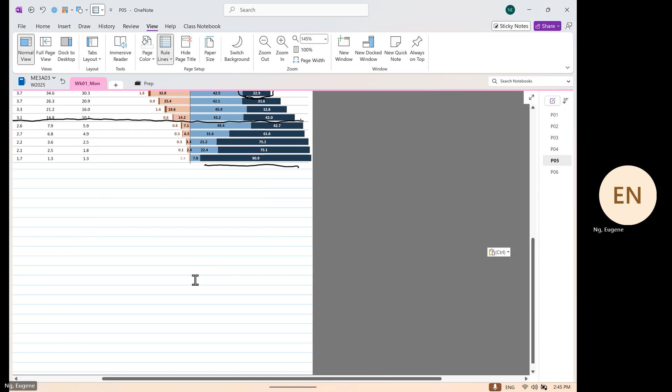It's normal, those of you who are in your third year, and those of you who are in your second year, it's normal that these courses are more difficult than any other courses, okay? The thing to watch out about your degree is the third year is always the year that you struggle most, and it's normal. Because why?

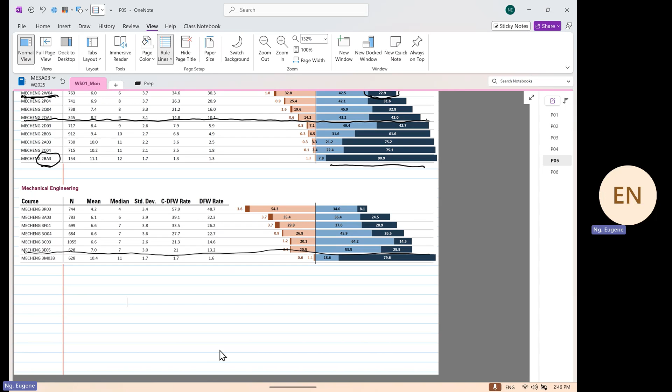When do you feel most pain when you run your marathon? Is it the first 10 kilometers? Is it the last 10 kilometers? It's the middle, and it's normal. Are we clear? Okay. So the toughest time, all these over here are your level 3 courses. Starting from 3R03. It's a bloodbath.

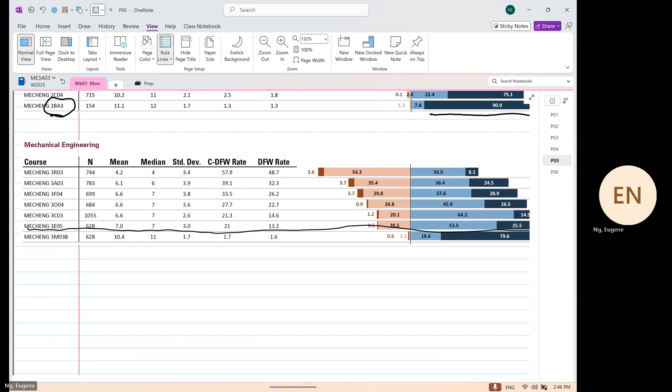You see that? And this was taught by the previous instructor that retired, Dr. Ross Judd. The new instructor, I love her to hell. She's like the female version of Ross Judd. Okay, it's good and she'll really train you well. What's the blackest? This course. Okay, what's the blackest is this course.

Are we clear? Okay. And then if you look at your, so this is year 3. So level 3 usually is normal to have what? Problems. 3E05, which I showed you the exam earlier, now is known as what? 3E03. When it was 3E05, the students were lucky. You want to know why? They had projects. Now you have what? Nothing. No projects. Are we clear?

So if you are going to protest, okay, go to the mechanical engineering department and protest that you need it to be what? 3E05. Are we clear? Okay. So now, yeah, 3E03 is tougher now than before. Are we clear? Okay.

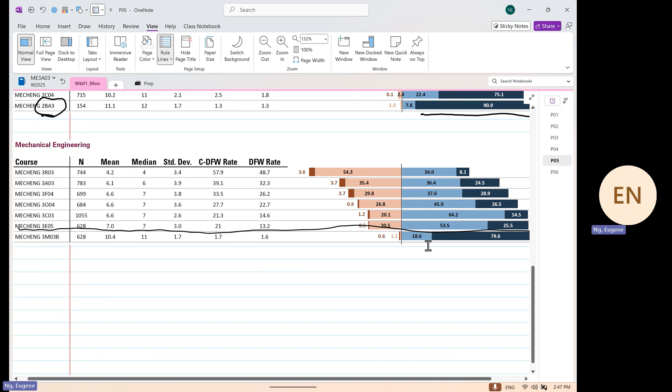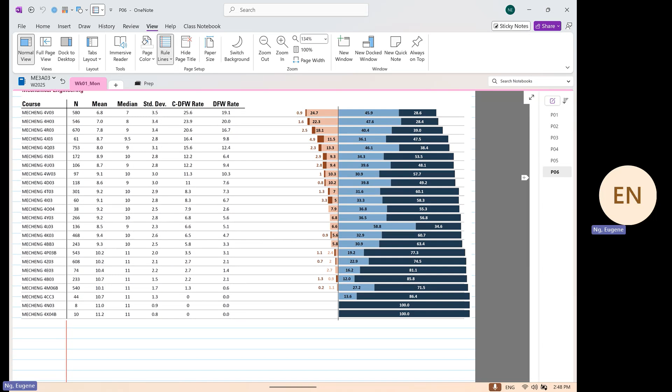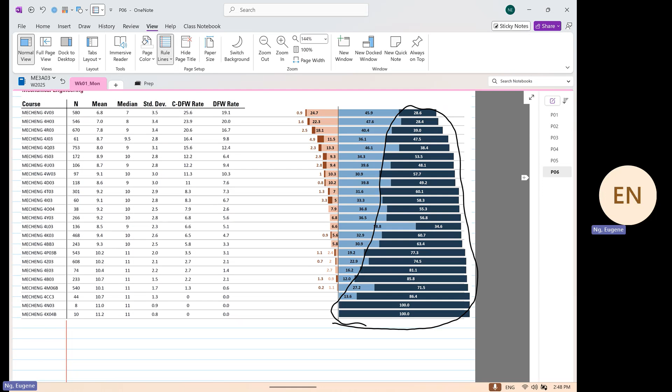Now, the good news is this. These are all holiday courses. These are all your level 4. Can you all see the level 4, how dark is dark? Are we clear? Okay. And I'm going to give this to you. You plan your courses accordingly, based on the information that I have given to you, and use it as a strategy. Are we clear? I can't tell you now, is it more black or less black? I can't tell you. We don't have the data yet. Are we clear? Okay.

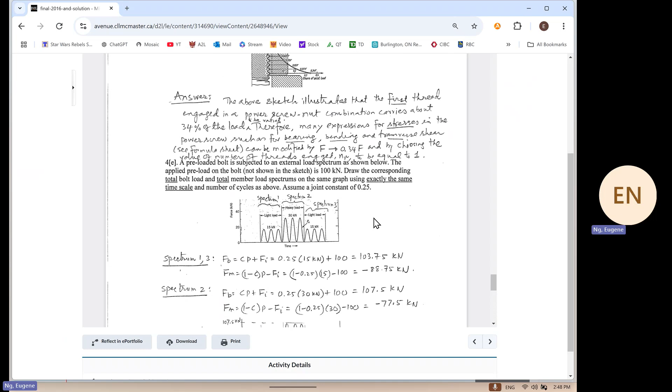So before I go on, oops, yeah, this guy is brutal, okay? It's killer, okay? Right. Any other question before I go on? Yes. Don't know yet. You have just come to the class.

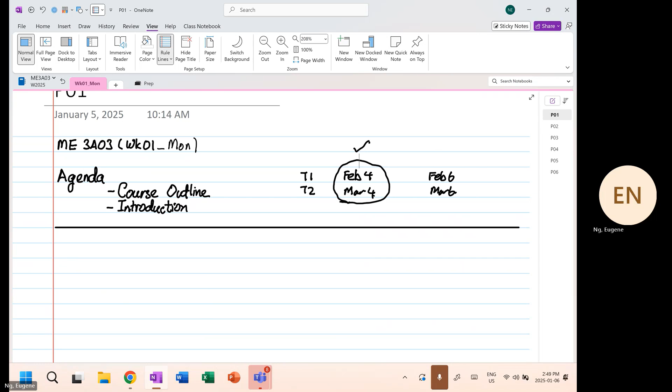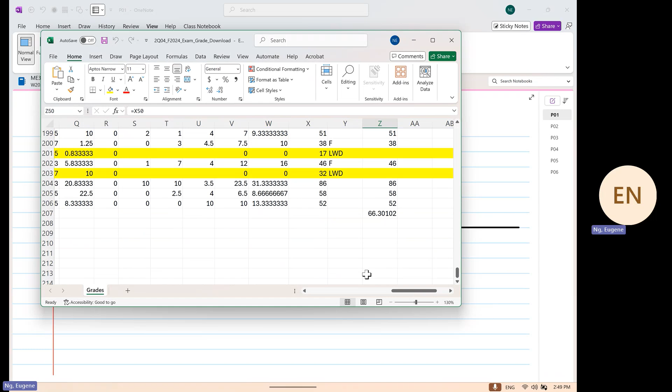2Q. I don't know what's the average for the final, but the average grade cumulative for the final grade. Holy shit. Wait. I don't know yet. Wait, okay. But there was a gentleman that got 100. And I'm looking at the grade now. Can you see anything? You can't, right? The average was a 66%. Okay, and that's normal. Say it again. Yeah, 66 is a C.

Okay. Any other questions? Yes. Say again. Yeah, I'll provide for you. It's to help you. It's not to harm you, right? Okay. Yep. Okay. Let's talk about this course now.

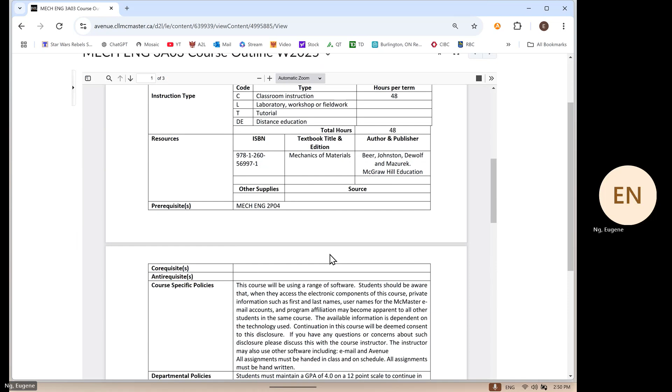So again, your assessment is by homework, okay? And then you got two term tests, and you have your final exam, and you must pass your final exam to pass this course. Are we clear? Okay. Any other questions before I show you what is expected?

Yes. The bell curve? Yeah, no. Let me think twice, okay? If let's say half the class fail and then the faculty of engineering is up my butt, yeah. Okay, but let's not go there. Okay, let's think positive and work hard. Are we clear? Okay. Any other questions?

Okay. Some of you might play the strategy, screw up term test 1 and 2, and do very well for your final exam. Yes or no? It is a strategy. Right? So don't attend this class. Final exam, we focus. And I'm going to show you why that is a recipe for failure. Okay? I thought about it though.

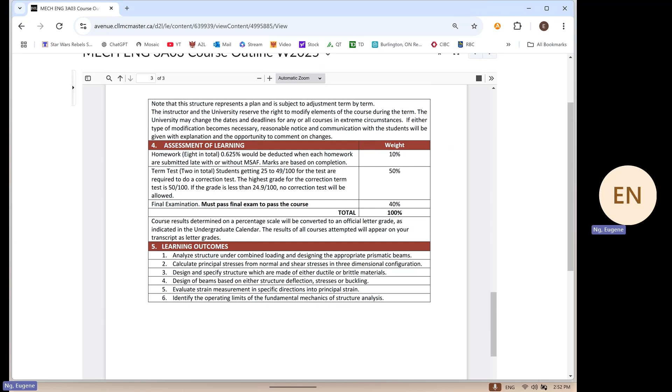If I've done this, maybe final exam is 40 plus 10. If I really do well, term test 1 and 2, I can mess it up and I can still pass. No, you will not pass. And now I'm going to demonstrate to you why you won't make it. If you look at the context of this course, what am I trying to teach you in this course? Okay, so it's like an introduction. Right. Let's go for the introduction.

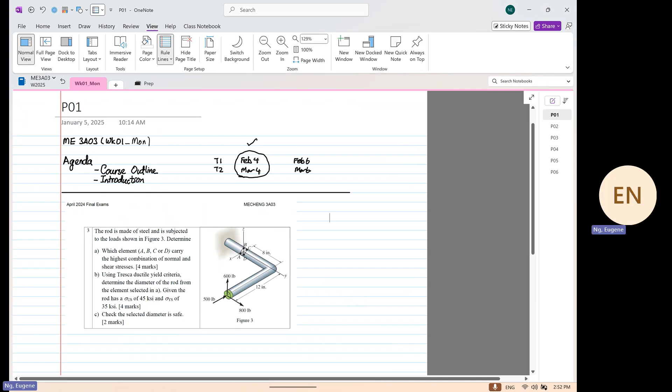This is April 2024 final exam. Okay. Rod is made of steel. It's subjected to the load shown. Determine which element will fail: element A, B, C, or D. Okay, do not worry, I'll post this on Avenue to Learn.

It's all yours. You guys, each of you pay $1,000 for this course. You deserve all this, okay?

Using Tresca ductile yield criteria, determine the diameter of the rod from the element selected in A, given that the ultimate strength is 45 KSI and the yield strength is 35. Why two? Why do I give you ultimate strength and yield strength? Why not just one stress? So you have to have the ability to know why, and what you're using. Check that the selected diameter is safe.

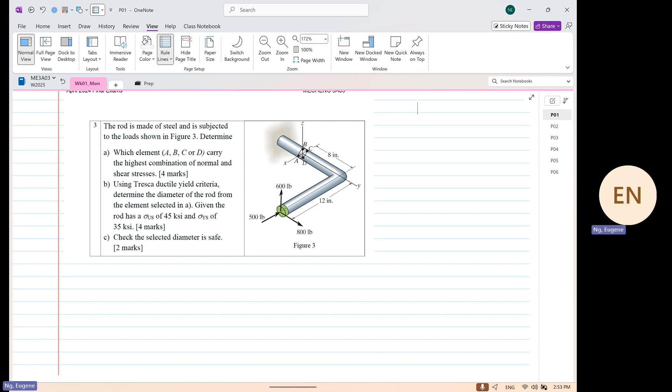Okay. So how are you going to attempt a question like this? But before we go on, let's talk about an important aspect known as factor of safety, or we call it FOS. Can someone tell me what is the formula for factor of safety? Anyone? Pick up your phone, start Googling. Come on. Yep. So the ultimate strength divided by stress allowable. Okay.

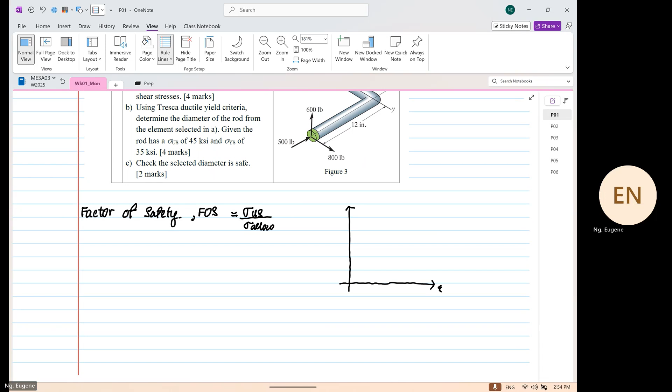Now I start drawing a stress strain curve for you. You should learn all this very well by now. What is point A called? And what is point B called? Anyone? Can you see where the problem is? Why is it not the yield strength, but the ultimate strength?

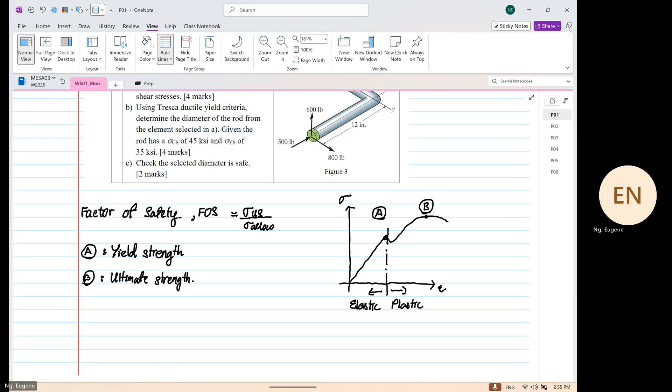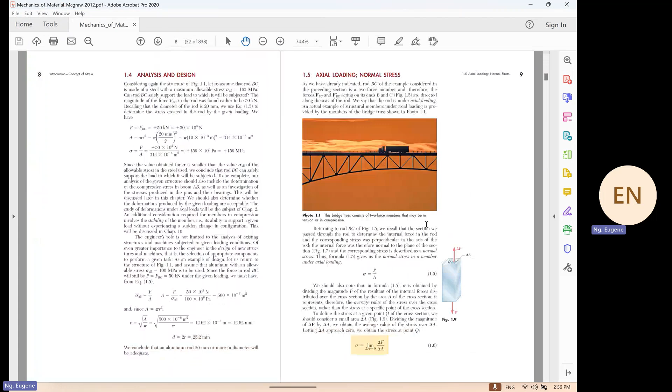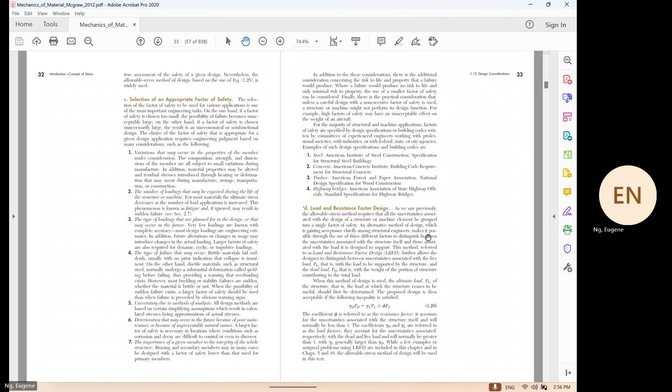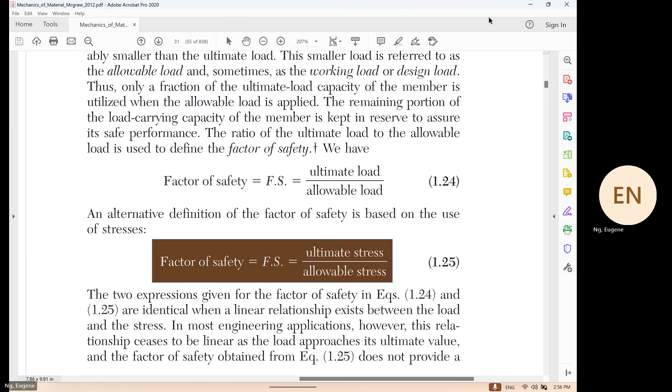If you were to go to a textbook, I have not a clue what the textbook will say, but let's go there. If you were to go to a textbook that you have downloaded illegally, the textbook will state... maybe the textbook doesn't say anything anymore. This is from the textbook, and it quotes that the factor of safety is equal to ultimate stress divided by allowable stress.

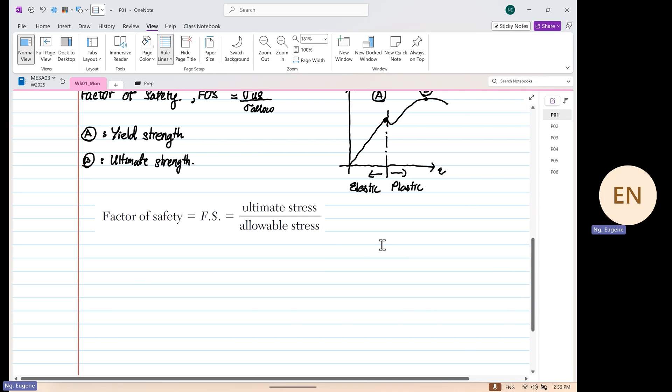But if you look at the stress strain curve, what does it tell you? I'm not training this class where people will just follow formulas without questioning. You have to question this. Anyone? Yes. Yeah, but which value should you use? What makes sense? Yes. Yeah.

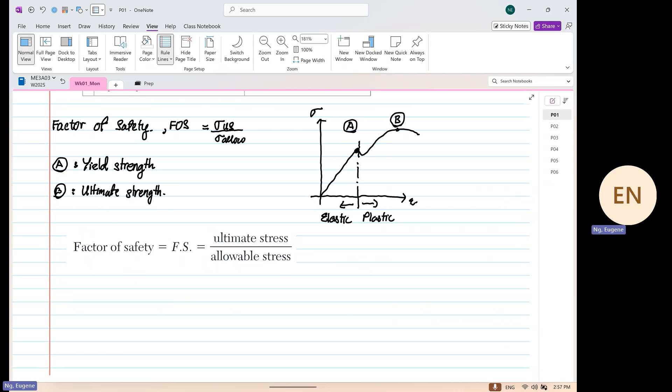Yeah. If you use ultimate, and you use a factor of safety of 1.05, what will happen? You design the Leaning Tower of Pisa. Yes or no? But wait, hold on. I'm not saying the textbook is wrong. So bear with me. Okay? Now, the black line that I draw down here is for what?

Ductile material. Now we come to a different type of material, which I'm going to draw in red, and it has a much higher Young's modulus, and then it breaks down here. So over here, this is stress yield, and over here, this is stress ultimate. So the red line represents brittle material.

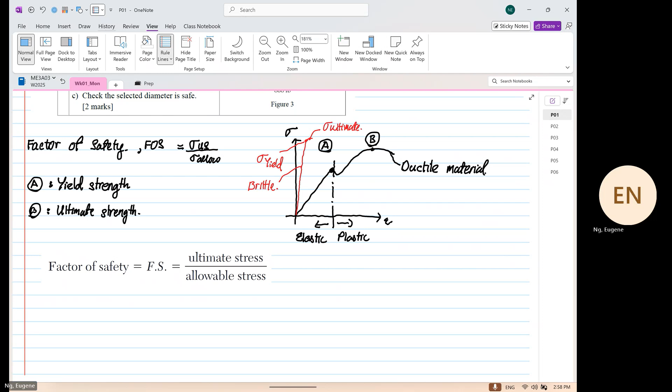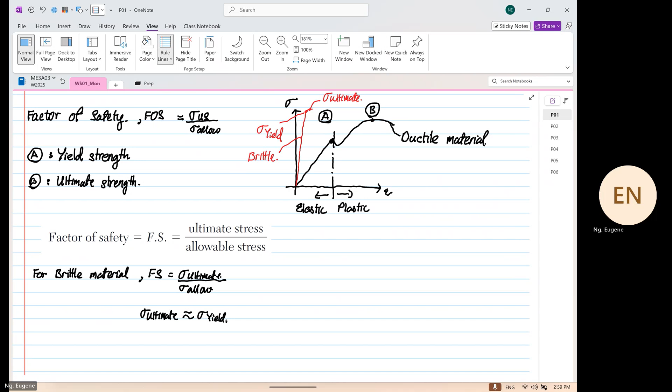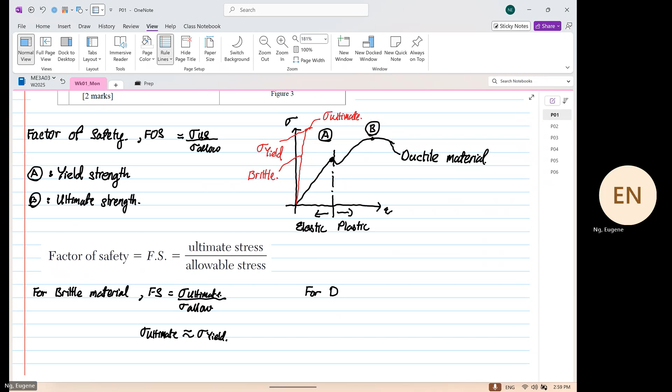Okay. So what I'm trying to highlight for you is this. For brittle material, factor of safety is equal to stress ultimate divided by stress allowable. Why is that? Because the stress ultimate is approximately equal to the stress what? Yield. Right? Can you see the brittle material? The yield and the ultimate, not a lot of difference. However, for ductile material, the factor of safety will be stress yield divided by what?

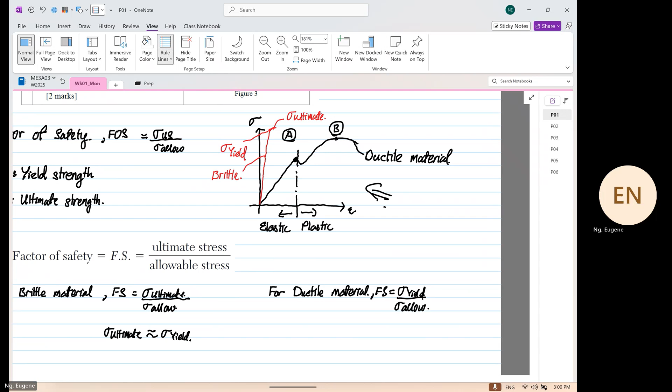Okay, let's make this very clear from the get-go. Are we clear? Any other questions? So as I say, the textbook is not wrong, it's just an intro. This is what you learn in 2P. 2P states that factor of safety is equal to ultimate divided by allowable. Nothing wrong with that. However, when we come to a material that is ductile, you have to change that to yield strength. And why? You can look at this graph and see why.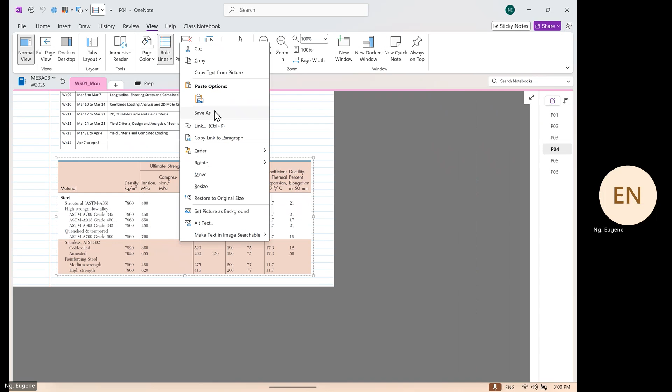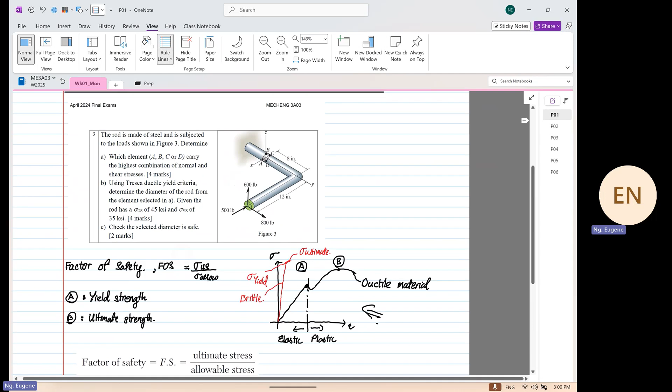Okay. Now, the question asked, for this case, we were given ultimate strength and yield strength. Now, how are these tested? How are these determined? As engineers, we have to know how things are being determined.

Yes or no? When I was undergrad, my professor didn't really care whether I understood or not. Until I worked for Rolls-Royce, I made so many mistakes. It's like, how were these determined?

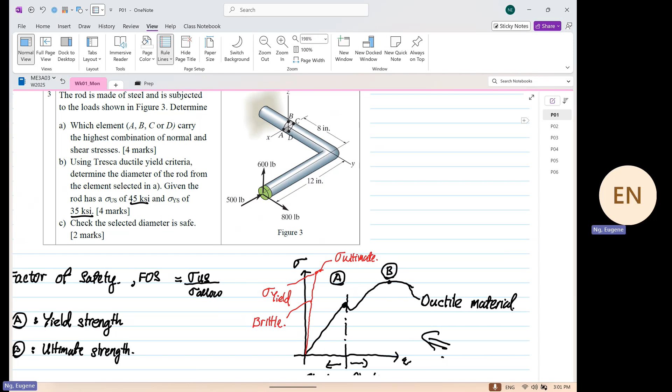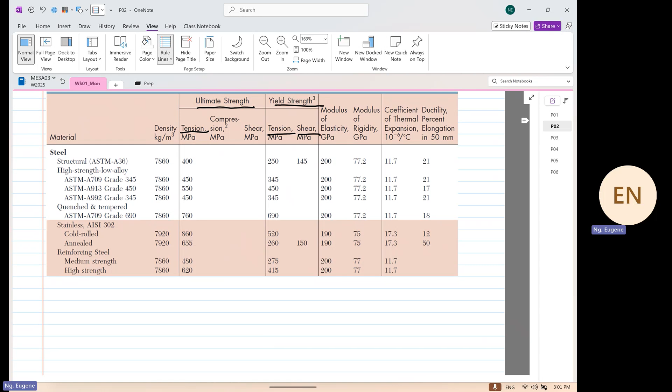Okay, so I believe in 3CO3 you were taught how mechanical properties are determined. So how are they determined? This is from a materials handbook. On a materials handbook, you can see the class of materials you have there. Then it states that you have an ultimate strength in tension, yield strength in tension. Sometimes you can have yield strength in shear, and then the rest is normal. Okay, the rest are like you got